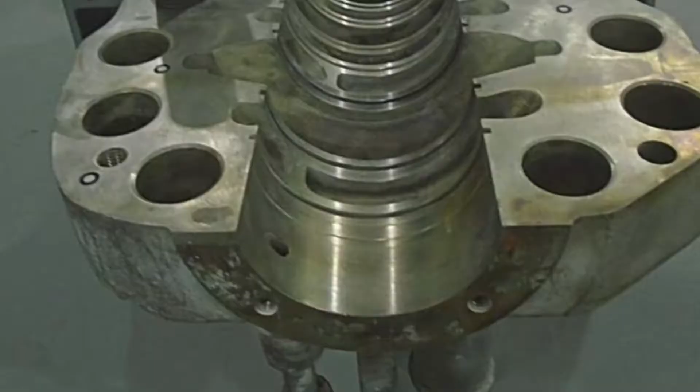I was contacted originally by a good customer of ours in Europe. They had an issue with contaminated casing, and they went to the OEM, and the OEM told them they weren't able to refurbish it. What they told the customer is that we can manufacture them, but it's going to be a long lead time. So they called Hydro to see what we can do, if we had a solution.

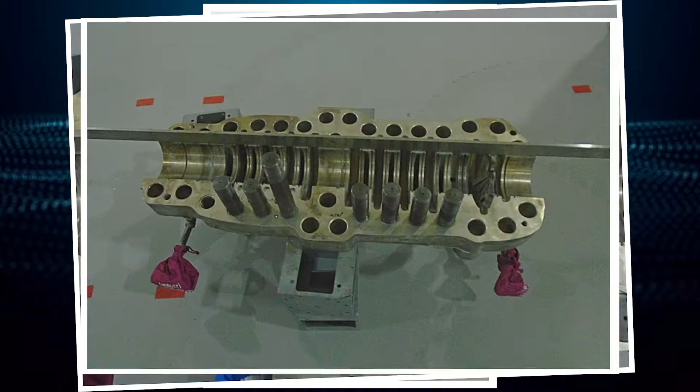The only real way of determining if the casing is repairable is for us to send one of our senior inspectors and get their hands next to the pump. We sent out one of our inspectors to the nuclear power plant in Europe to do a full, very detailed dimensional inspection. Once we got all that data, our engineering group looked at it and confirmed that the casing could be repaired.

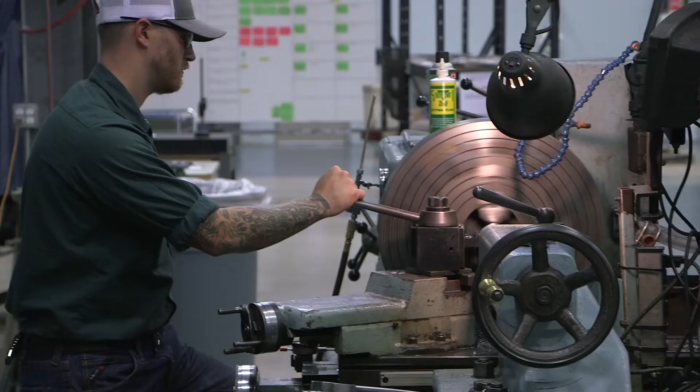This casing is contaminated. What makes that challenging is there are a handful of contaminated machine shops in the world. We contacted 3 of them, and after a deep discussion on their method of machining, we felt, although they said they can machine it, it wasn't to our standards. We contacted a few places.

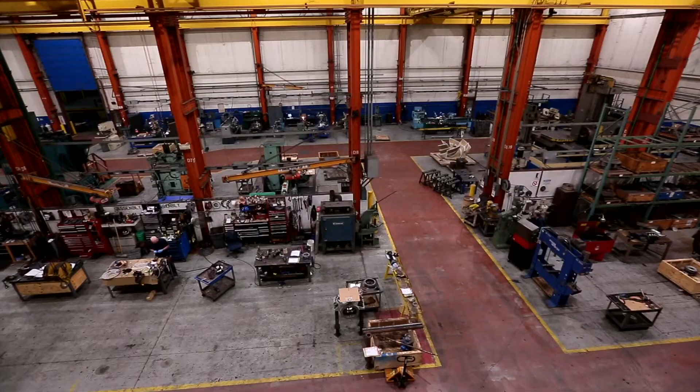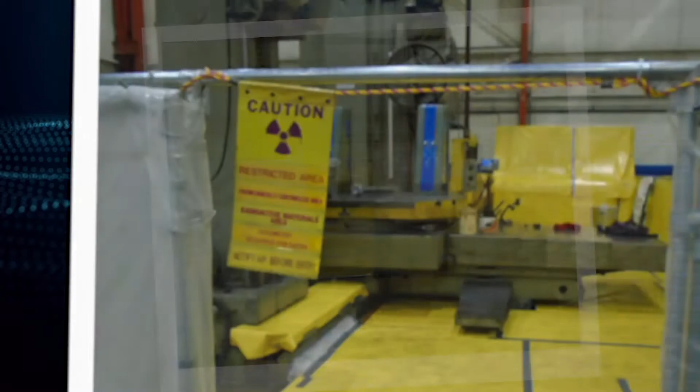One, our sister company, Hydro East. We had to get their people trained and qualified to work on RAD contaminated equipment. And then number 2, we had to prepare their shop to accept a contaminated component. Basically, we were going to create a contaminated machining center in a clean shop. The other supplier was our radiation contamination supplier, where we would bring the casing into, and they would transfer their license because their health physics had to be with the casing at all times.

Once it was approved, the casing was shipped to Hydro East in Philadelphia. The nuclear plant had a spare rotor assembly that they wanted to assemble this into once it was received back at the plant, but they couldn't ship that into us.

We need to ensure after we machine, those parts still fit inside the casing. Plus, this is a multi-stage pump, so we had to make sure the concentricity between the stator and the rotors are maintained after the repair. To do that, we needed the parts that fit to the casing.

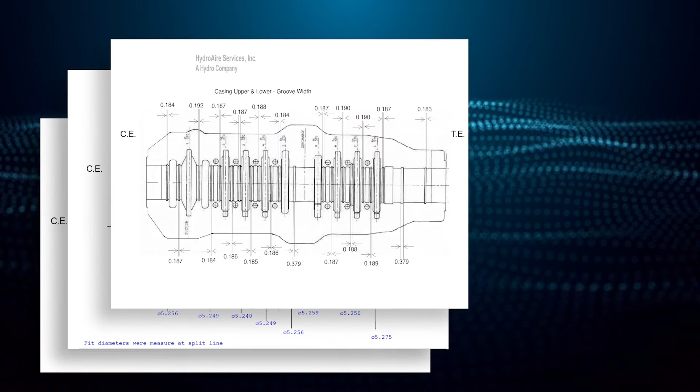So what we did while the inspector was out there inspecting the casing, he inspected all the casing rings, the actual diameters that go fit into this casing. For that, we had to reverse engineer the mating parts that get into the casing, and make some dummy parts to fit inside the casing to measure the fitment and the concentricity between the parts.

When we make the dummy casing ring, we have to account for the gasket compression ratio and assemble it here to make sure everything fit, and check the TIR on the ID of the casing ring.

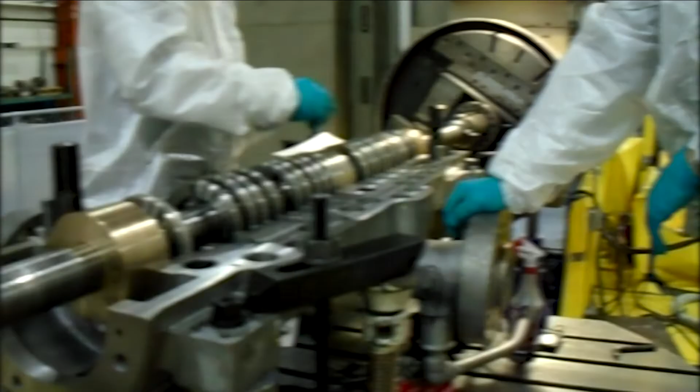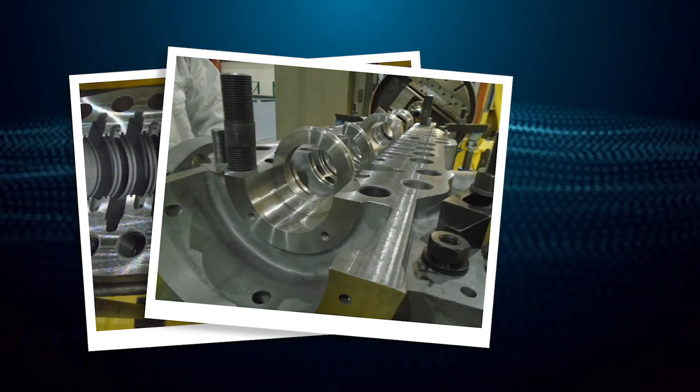When we fitted the actual part, when we received it at the decon shop or hot shop, we saw that the actual parts are fitting. So the pump has been installed. That tells you the method we used to eliminate that risk of interchangeability worked out well.

The customer was very happy with the performance and how we did it in such a short period of time. They, I think, anticipated it would take months. We worked on it 24/7. We did the project over the course of 6 days, 2 12-hour shifts, and we were on time.

Worked out really great. They were very happy with the teamwork, including them. They helped us also with everything, and it was a great team effort throughout. The regulators were happy, the customers were happy, and we made it possible as a team.

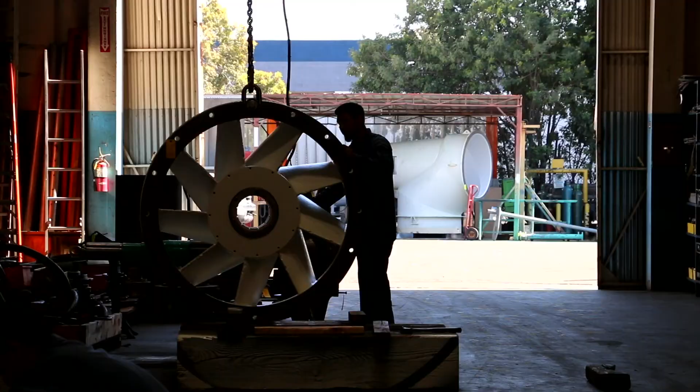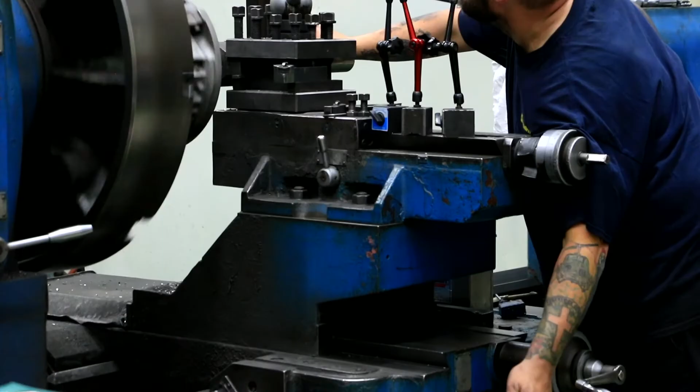We are a unique company with engineering, contracts, production, management, all close-knit, close working relationships for us to align all of our capabilities in focusing to a successful outcome for the customer. That's what I think is what makes us unique.